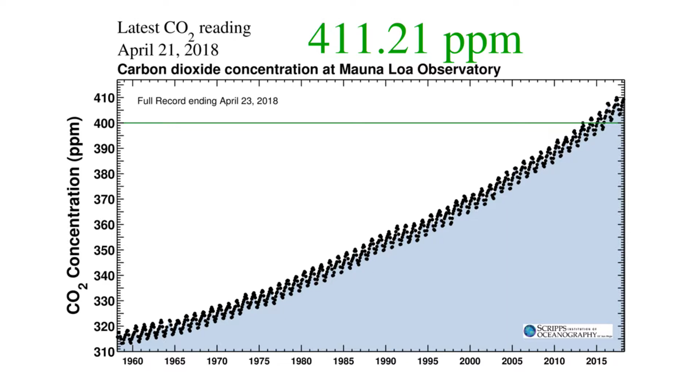We exist because the world is heating up, and you can see the Earth now has a 1-degree temperature rise. To avoid a 4-degree rise, energy reduction is needed now. UK energy between transport, industry and domestic is roughly about a third domestic, as in buildings and so on.

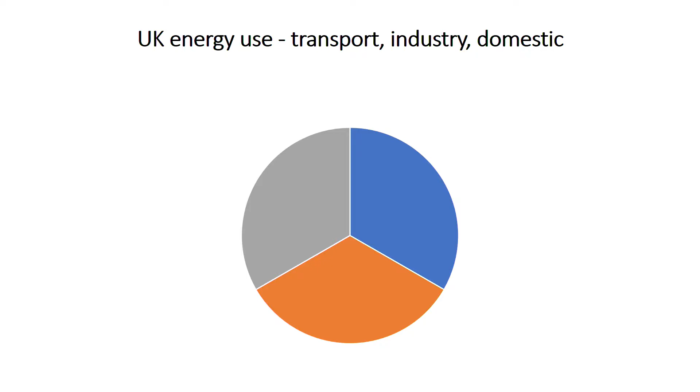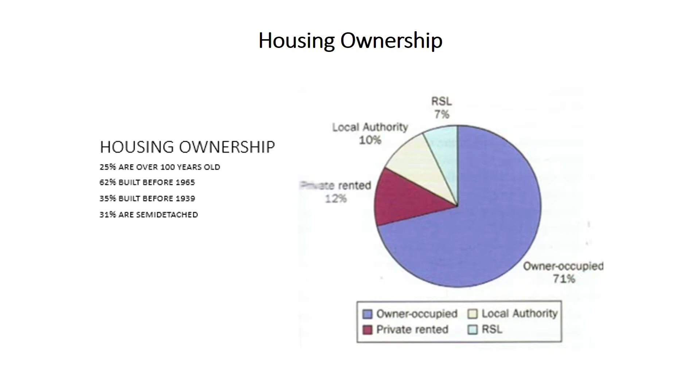These buildings are difficult to retrofit and so on. Housing ownership - private, rented and owner-occupied - is 80%, and very difficult to reduce. Residents have no clue what an EPC does. It gives a little bit of help, with millions of houses to tackle, but the question is how to do it.

Now, a few years ago, whilst pondering this situation, I realised my 40-year career in thermal imaging showed that it found faults and stimulated immediate action to fix them. So why not use it to inspect our houses?

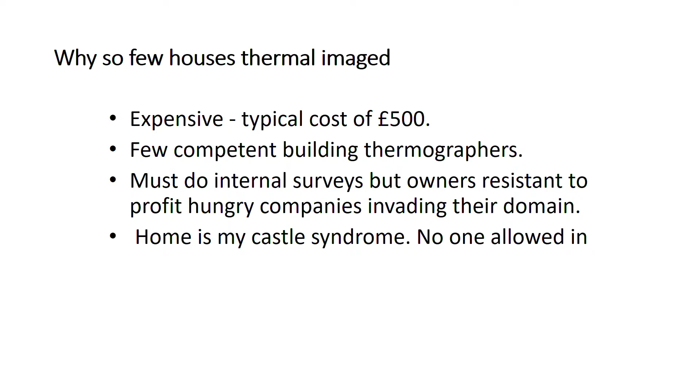The problem is that very few houses are surveyed because of the cost, and there are few building thermographers, and we've got to get inside houses in order to do any surveying. The solution was: get the kit cheap, do the survey incredibly quick - 2 hours - look at all services, and don't bother writing a report. The idea was, would this work?

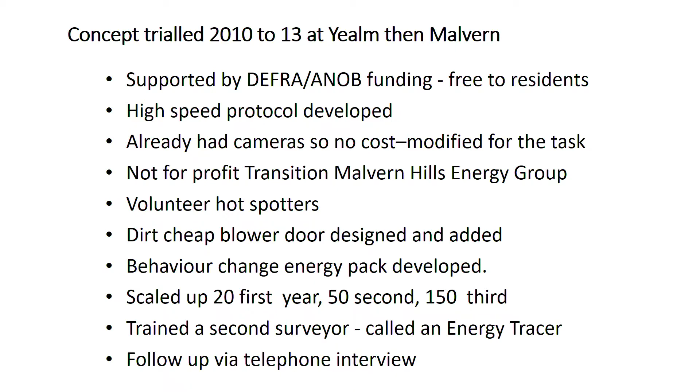So we put it into action. We trialled it at Yealm and Malvern, and it was a very comprehensive trial of technology and protocol over 3 winters. We ended up doing 150 houses in the 3rd year. The feedback from that was very, very good - 65% had already acted within 3 months, mostly with draft proofing.

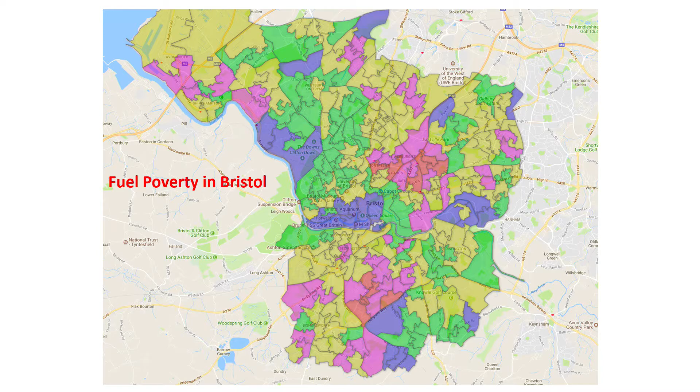So we formed a company called Energy Trace CIC to spread the concept to other parts of the UK. And we met this bunch called the Cheese Project Team in Bristol, the 3 guys there. They were inspired by this map of Bristol showing the areas where people haven't got enough money to heat and eat at the same time.

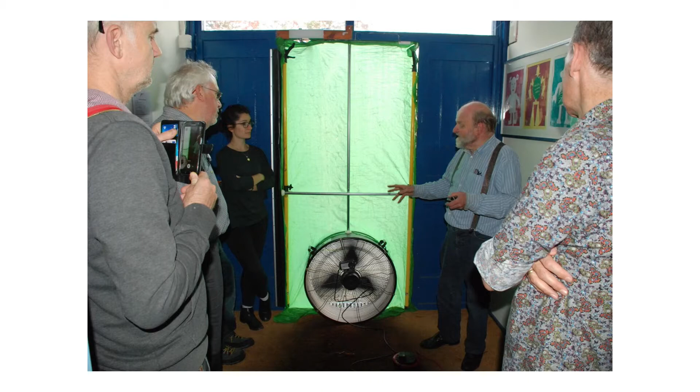We put all the kit together into a nice box, and then myself and Jeremy, who's a top-flight IT guy, developed our own application to run on the iPhone called HeatView. I introduced a blower door I had developed. This cost £150, very cheap.

It draws in the drafts so you can see them with the thermal camera. I also wrote a CPD-accredited course, a 3-day training program, which Jeremy covers the IT in. You can see the interpretation of images being trained there.

Now over 30 energy tracers have been trained and certified. 300 properties have been energy traced in Bristol, but together with all the other ones, we're approaching 1,000 houses now.

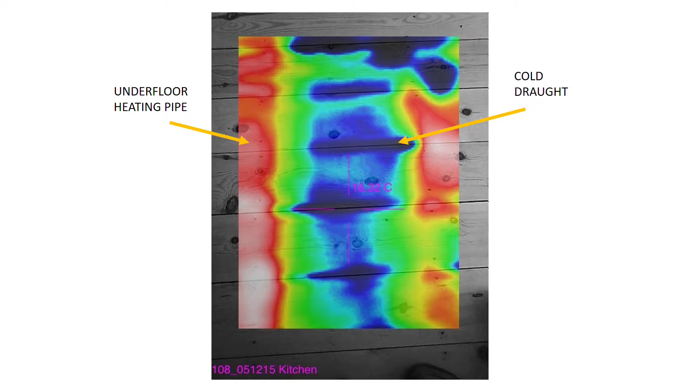It's used like this: the householder sees the picture on the tablet, sees the fault, and it compels them into action. Here you see a disaster of an extension, stripped floorboards, various window problems, missing insulation in walls. The big problem with dot and dab, which is a huge scandal.

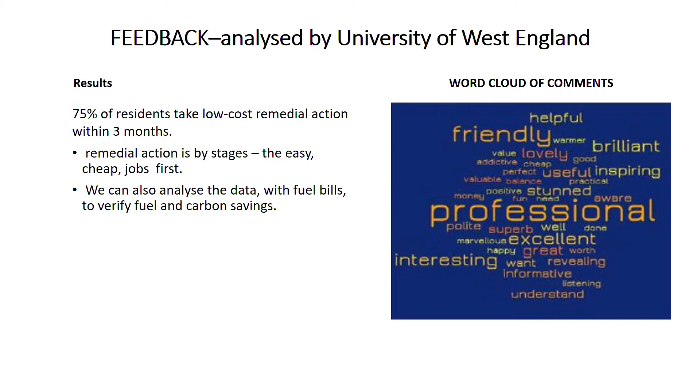And then here, more dot and dab. We leave a report on a stick with it, and an energy pack so people can actually leave there and do their behaviour change. Here's feedback analysed by University of West England, which repeats and gets the same results as got in Malvern. Masses of testimonials all over the place. Nobody hates us, they won't let us leave.

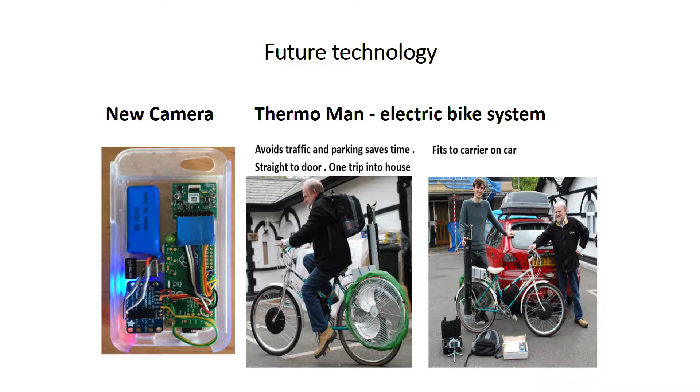We are expanding it now into other segments: South East London Community Energy, Phoenix Housing Association, Bath just picked it up, we've got about 8 more in the loop. Future technology coming: a new camera, all our own design, hardware and so on. Thermo Man, the whole system on an electric bike, so you can get around city centres. And now a project called CHEESE plus WUSU, warm up, and whatever it is.

Financially, we have got a balanced situation. We need funding to expand it from hundreds of houses per year to thousands - that's the main reason for that. And finally, we've won a nice award from Community Energy as the most inspiring energy management and conservation project in England and Wales. Thank you for looking and listening, and that's the kit.

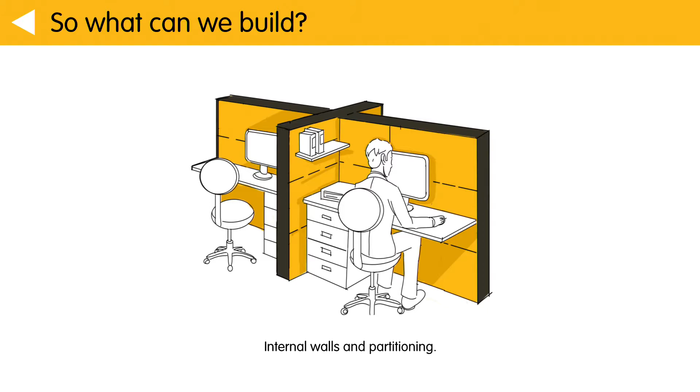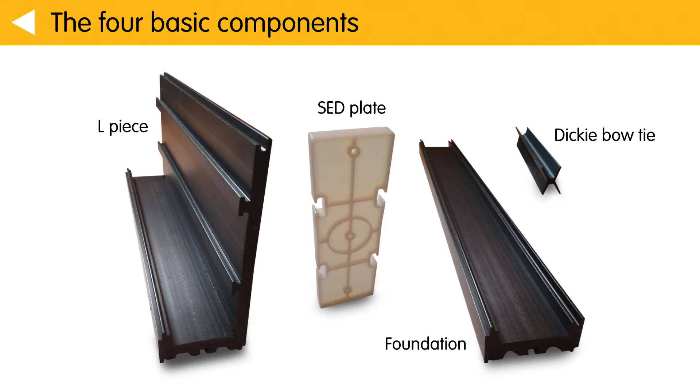Using these four components, we can build walls, and we can build anything out of it. We can build interior walls and partitions. We can build humanitarian shelters. We can build flood defences out of it. And we can even build buildings like this.

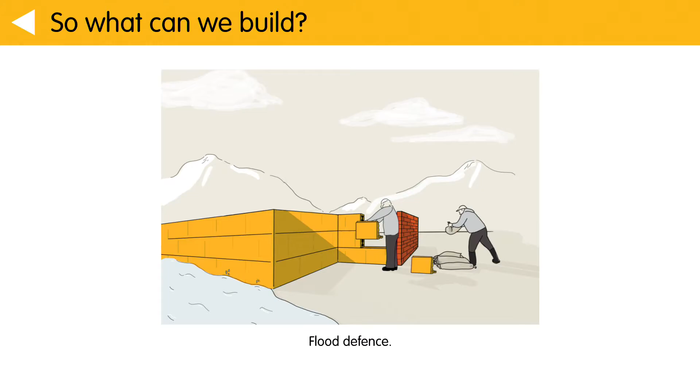What we do is, we have long extruded pieces that we build in an offset manner, offsetting the front to the back, and build block shapes that aren't really block shapes.

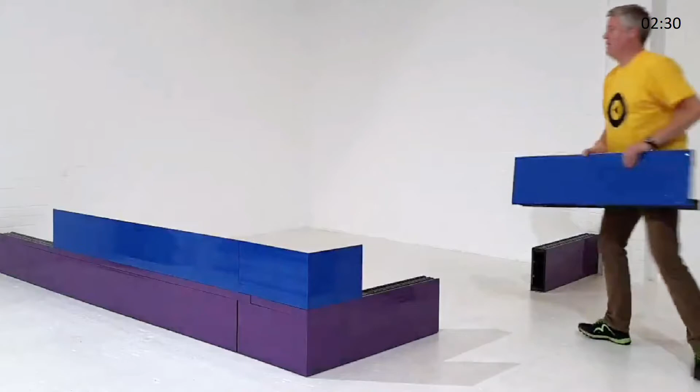As you can see in the top right-hand corner, this is how fast it takes me to build this building - I built that structure in just under 15 minutes. We can run cables and pipes through conduits

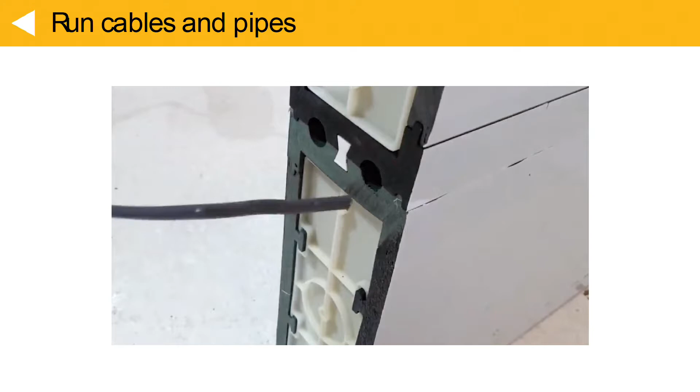between courses. We can fit any sort of sockets and boxes and tie them straight flush to the wall.

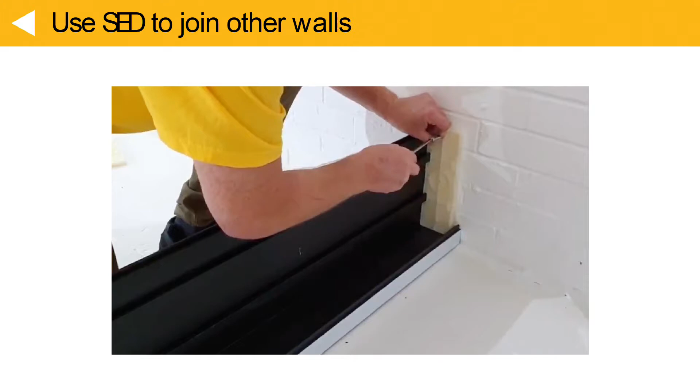We can even tie the Oval wall to non-standard walls, or non-Oval walls, should we say. We can attach windows and doors, and we can even put foundations in. As a final little piece, we can also build roof trusses.

And we can paint it, clad it, or even

wrap it. And when it's all said and done, we can pack everything away to one fifth of its original size.

We use no tools or glues. Only limited building skills are required. It's fully modular, and it's fire retardant.

It's patented in the UK, Europe, USA, China. And basically, you can't reinvent the wheel, but we believe you can reinvent the wall.

I'm Gary Giles. Any questions? Thank you.

Okay, so I've just been over in the resourceful materials session, so I'm quite interested in the whole plastic waste aspect of it. Could you expand upon what's going into it and where you're getting the stuff from?

Yeah, it's styrene based with an additive - an iron oxide additive - to make it unflammable, should we say. Sources of material are quite wide, really - anything from plastic hangers to the stuff your fridge comes pre-packed in, to parts from the interiors of scrap cars.

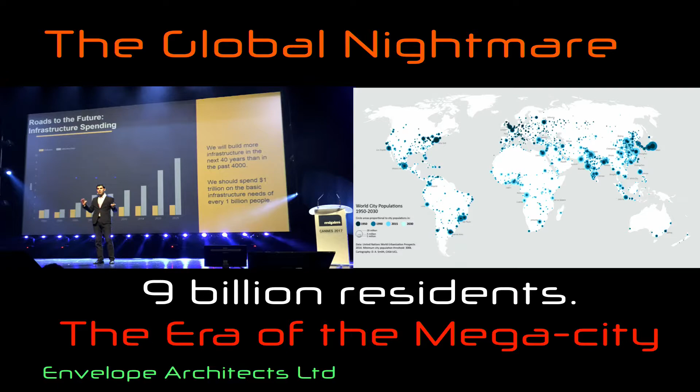There's 9 billion people in the world, according to global economists, and we're entering the world of the megacity. I don't know how we're going to get everyone around, provide good services, and how we're going to construct in this very compressed world.

Currently we've got this 2-chevron process on the motorways, up above 6 cars per 2 chevrons. I think with autonomous travel we can get it down to about 138.

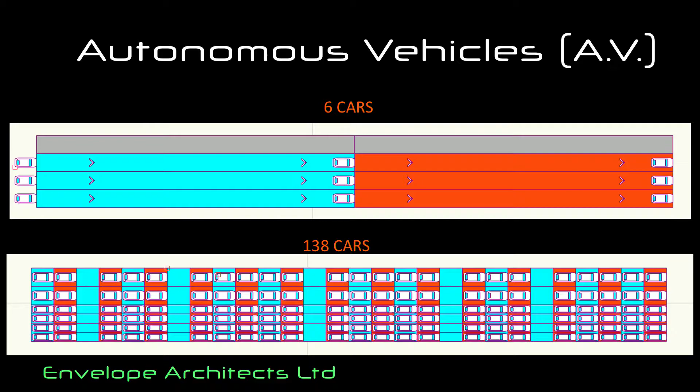So we've been thinking about this quite a bit. I think if we can get rid of all the heavy lift trucks trundling along during the day and put it on the night shift, that would be wonderful. So I'm into autonomous night driving with HGVs.

The displaced drivers can come into the construction industry because we have a skills shortage. So lots of good stuff going on with diversity, we need more of that. There's more training, retraining of servicemen, but I think getting all the drivers off the road and into construction would be great. We need to make construction more sexy.

I think let's get people becoming, rather than labourers, technologists. So there's autonomous dumper trucks, remote control, amazing things happening on site. We are really excited about that.

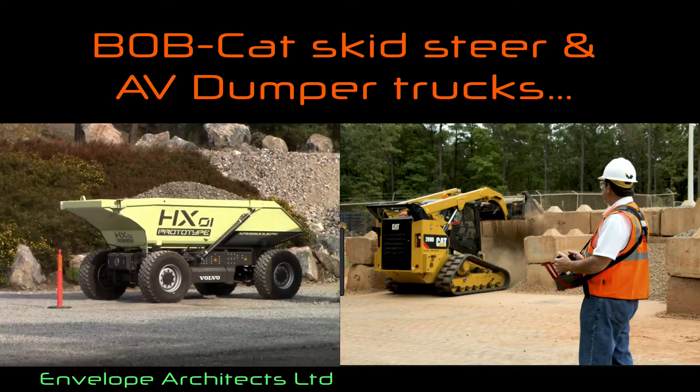For the challenge we've designed from scratch a variety of products that can work on site. This is a catch-all, a pallet shifter for bricks. It can move sheets of plywood and plasterboard around, put up plasterboard with self-balancing devices, go up ramps and stairs, and even fly in insulated concrete formwork. So that's helping everyone on site.

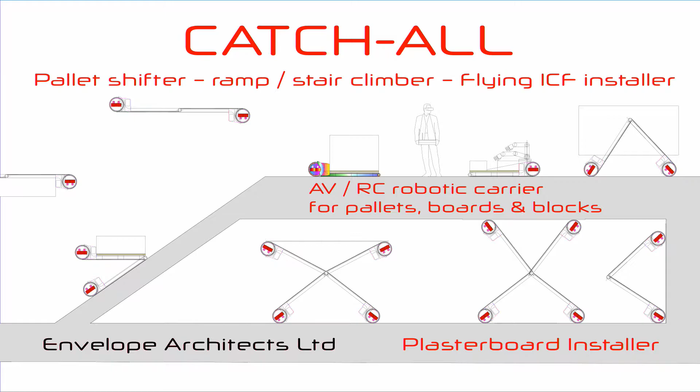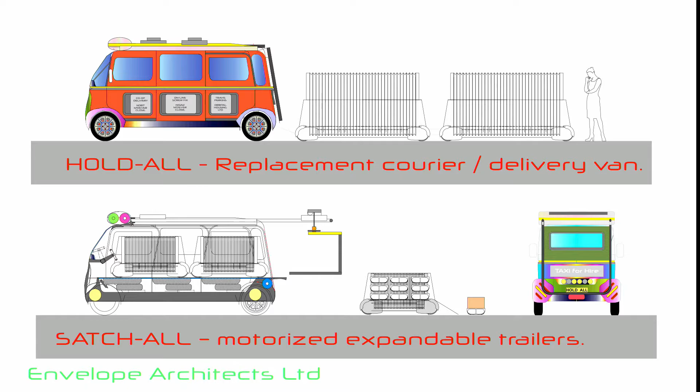We've designed a 9-seater minibus that can be compartmented into 3 different sections with complicated roller shutters, and also expandable trailers which we call Satch-All. So the Hold-All's a van - it becomes a pickup truck after becoming a taxi, so very useful indeed.

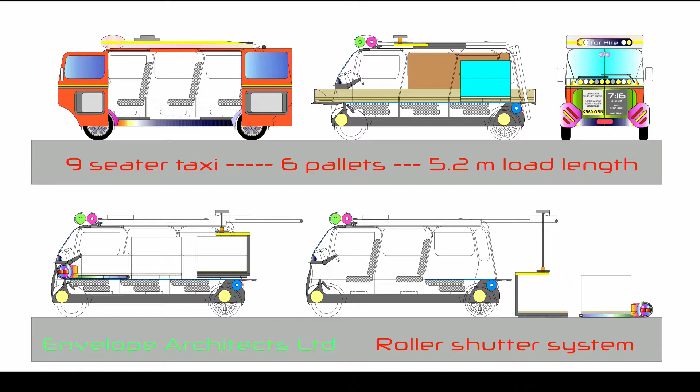You can see door-to-door, a 3-metre opening with no engine bay. We can move 5-metre I-beams around and 6 pallets, and also deliver it with this pallet lifter roof rack and all the complexity of the roller shutters dividing spaces.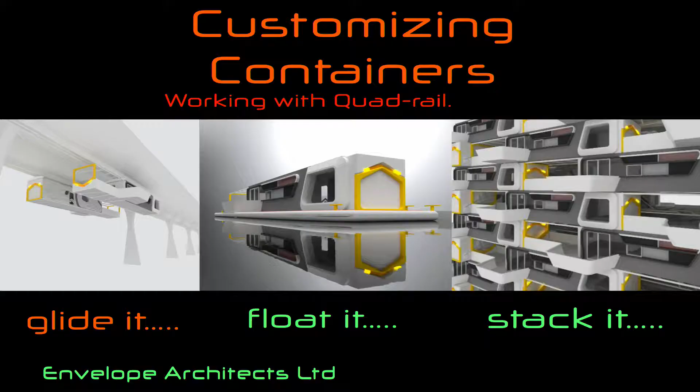Very, very efficient - it can go on the train, on the road, it's fully versatile, it can even go on the Hyperloop. This is us messing about with Elon Musk's idea of the Hyperloop. We've got converted sea containers that go underside of the tubes there. It could be an elevated railway.

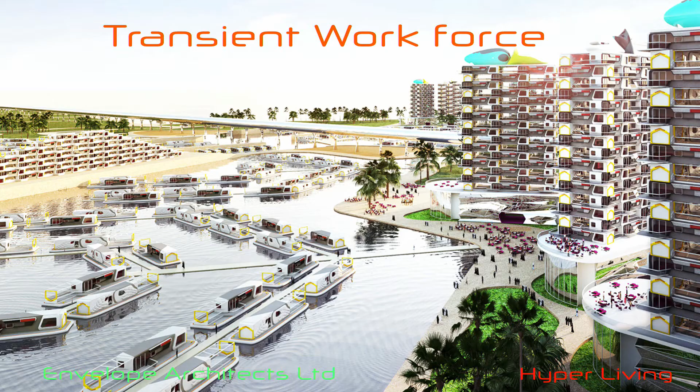Glide it, float it, stack it, and then you've got plug-and-play apartments that could also rest in pontoons. So we can actually do this. They're going to put 1 million people in between Oxford and Cambridge - we made a submission for that.

Instead of putting 60 miles of track down on the earth, we could elevate it and leave that 60-mile stretch as a linear park - that's what I think. There's quad rail there on the right, not quite the Hyperloop because we've got a few bends and twists.

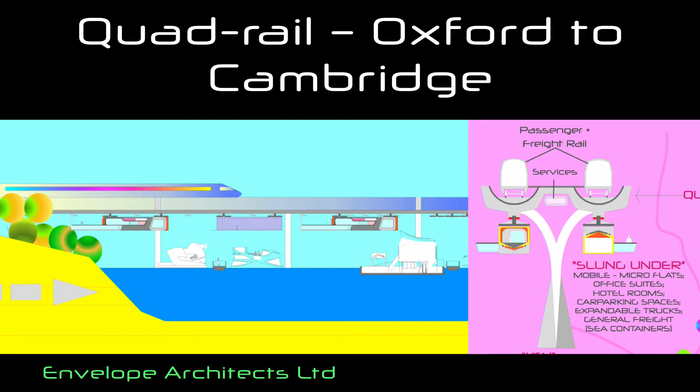Keeping with that mobile idea, because I'm very interested in mobile demographics, we're very interested in populating the tidal lagoons, which I think should happen in Swansea and Cardiff and the other 3 locations on the Devon coast. So we've designed a range of floating buildings that could inhabit the 11 square kilometres of space.

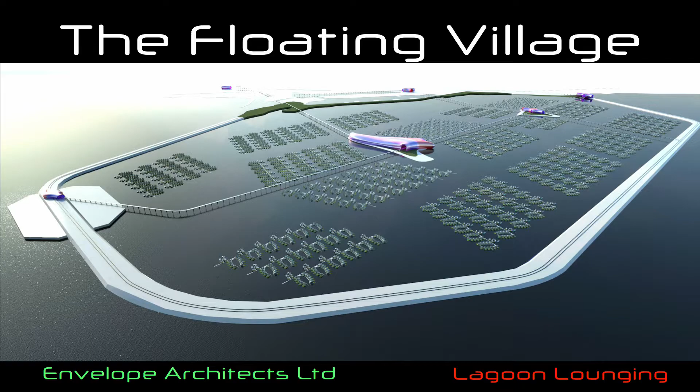We also got mass production, mass personalisation with trying to blur the edges between office, work and home with our Bloom housing - this is the Sunday Times runner-up.

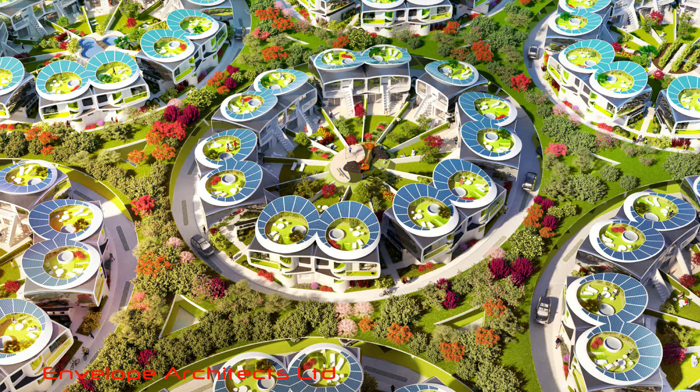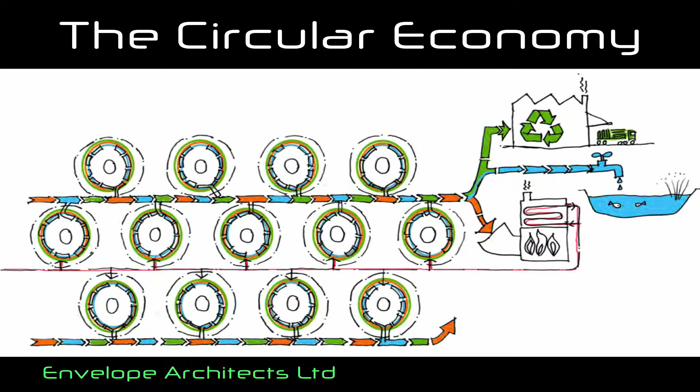This is a very clever design with an elevated forest, which has underground a circular economy with plastics, to convert plastics back into buildings, but also deal with flooding, which we're seeing a lot of.

We want to revolutionise with these mobile container workshops, which we call Boxels, so we can liberate people to build their own houses with assisted robotic remote workers, and perhaps heavy lift airships as well.

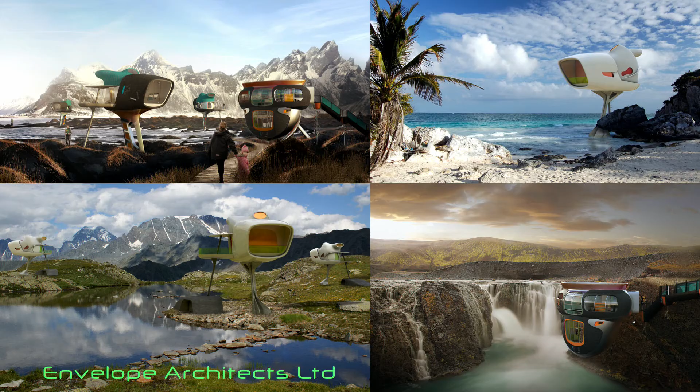This is a future city that we've been playing with where heavy lift airships bring goods in and out, and perhaps they could also deliver a little bit of extreme boutique off-grid holiday relaxation.

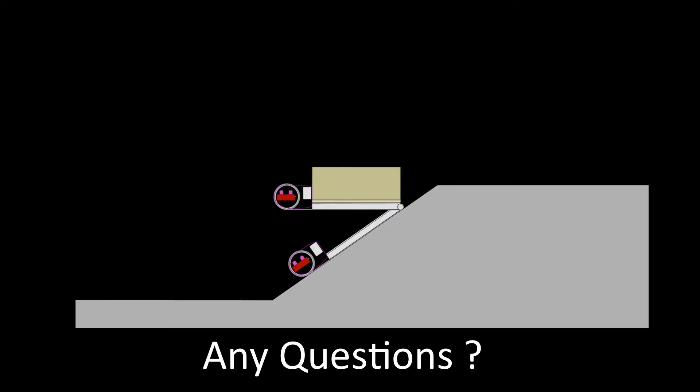No, I think I've been up to see a company in Swindon that does very large format 3D printing. So I think we're going to move on and focus on the pallet mover, and also the pod at the end that we showed. I think we're going to try and print that. If we win, perhaps we can show it here next year. So that's our focus, I think it's a lot of work to be done. We're going to need lots of friends.

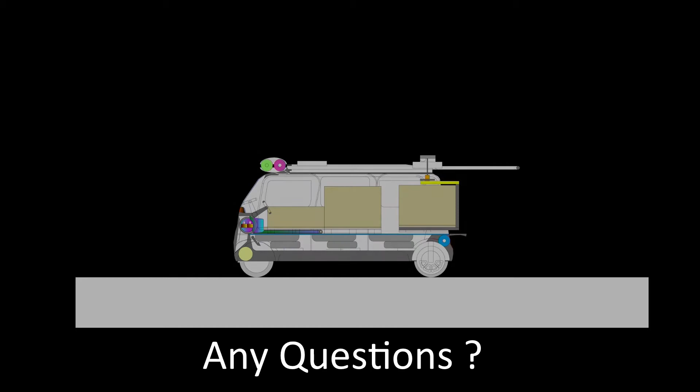And we need to probably make some submissions to the various innovation grant organisations to move it on. So perhaps the next year is about model making and forging partnerships with the right people. We have submitted previously some innovation grants, and we've also got the Orbital House that I showed you, the Sunday Times house. We want a place to build a show home up at Graven Hill.

So good question though, we effectively took the challenge in October and designed these modes of transport. So we're travelling at some pace.

Thank you, that was a wonderful journey.

I don't quite understand why you would focus on the pallet or plasterboard installation device rather than what I think you called the shovel, which was the transport node or end-to-end node. So what would you do first, and why do you do that first, and how do you get to market with that proposition? Yeah, so for example in Oslo, in about two weeks' time, there's an EV-AV conference, which I think is being dealt with by one of the partners here.

And you're right, it's quite a lot to focus on. So I guess a mobile device that I can manage is probably the pallet lifter that can climb and be self-balancing, and I think I'd probably like to work with a university. I have been on the Innovate Succeed programme, so I have started to forge relationships, but I need to get collaborators involved, and I think if I'm successful here, that would give me the exposure I'm looking for, and also the backing from the BRE. I've been to see them, they wanted the Orbital House put at Watford actually.

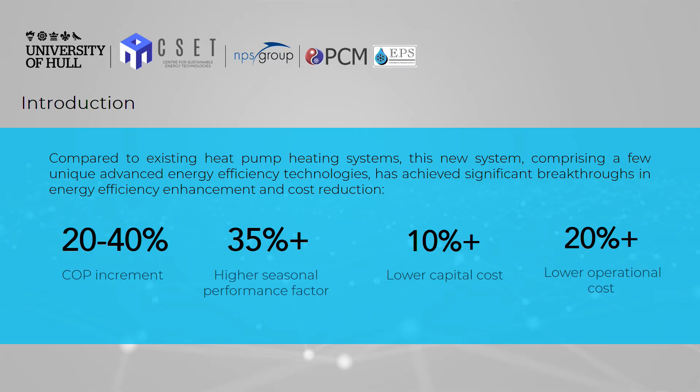Through 2 years of research, including simulation, optimization, prototyping, testing, and demo, we found our technology, compared to existing heat pump technology, can achieve around 20 to 40% COP increase, 35% higher seasonal performance factor, 10% lower capital cost, and 20% operational cost reduction.

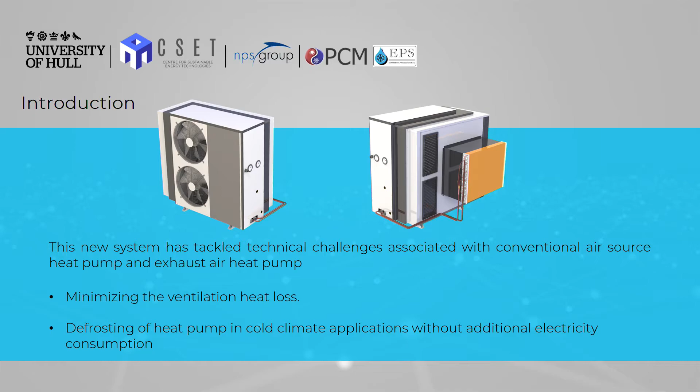Compared to existing air source heat pump and exhaust heat pump, our technology can maximize use of ventilation energy, minimize ventilation heat loss. We don't need additional electric input for defrost of the heat pump, with significant energy saving.

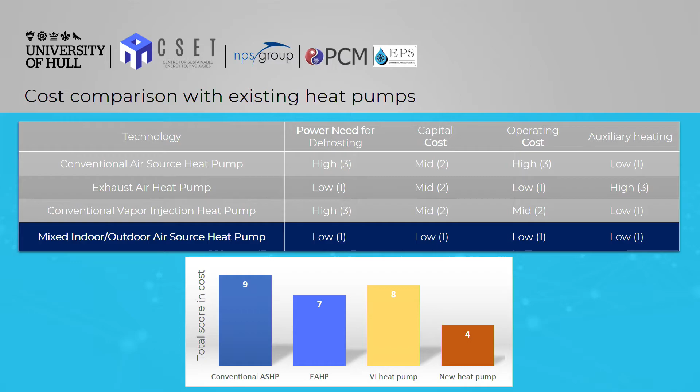Compared to conventional air source heat pump, exhaust heat pump, and conventional vapor injection heat pump technology, our technology needs the lowest power input, our capital cost remains lower than others, operational cost is least, and we don't need additional heat supply. Our system can supply enough heat for the building without any external heat supply.

This is a heat pump that can absorb exhaust air energy as well as fresh air energy. It's a double source heat pump that leads to about 30 to 85% increase in heat pump COP.

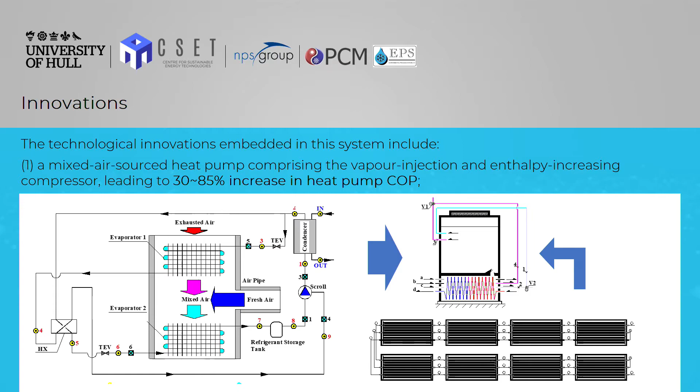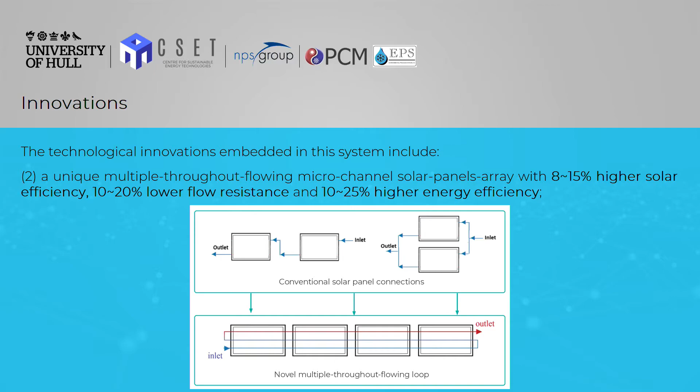We also have a multiple through-flow solar panel array, which can average the temperature of the solar panel, leading to significant increase in solar efficiency, which is 8 to 15% higher. We got 20% lower flow resistance and 10 to 25% higher energy efficiency.

We also make use of fast responsive heat storage heat exchange, which can capture solar energy and quickly deliver it to the room space, only 20 minutes whenever solar radiation is available. A traditional system would need at least 3 hours, which is significant energy loss.

We also make use of an internet-based intelligent monitor control system that enables instant interaction between human and machine.

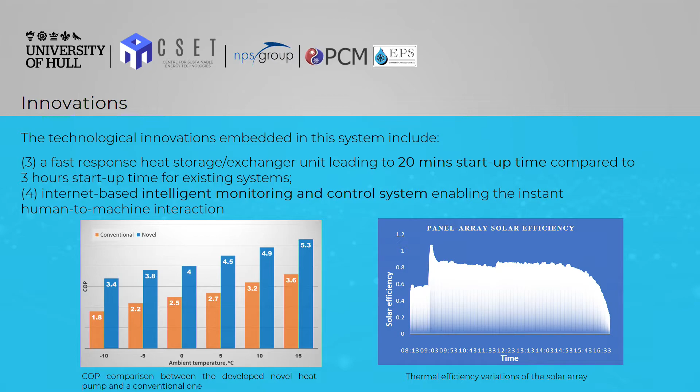This technology has been applied to the Guangdong 5-Star Solar Energy Limited building, and also the Applied Science Building at University of Hull, and shortly at Hull City Library. We have first generation system, second generation system, and third generation system.

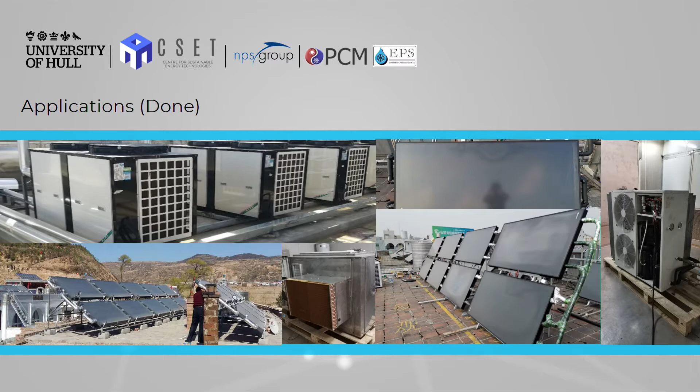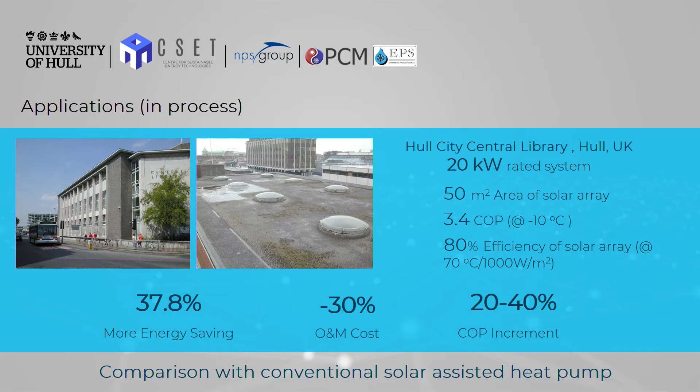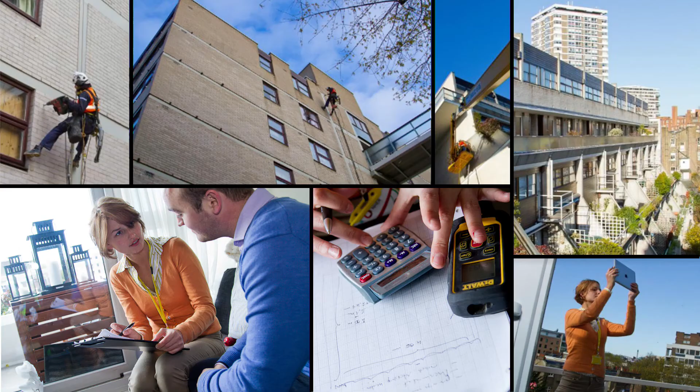Thank you very much, my name is Agnes Czako, and I'm a co-founder and managing director of Airex. We have developed a smart home solution to address the building retrofit market and address fuel poverty and climate change. My background is in building physics and passive house design, and prior to co-founding Airex, I led the delivery of 30,000 energy assessments in the most vulnerable, fuel-poor communities in London's social housing.

This was, on one hand, a very shocking but also a very eye-opening experience to see what the real problems are in real people's homes when it comes to energy efficiency and damp condensation. Poorly insulated, drafty homes contribute to 26% of the UK's greenhouse gas emissions. Recent research demonstrated that up to 15% of a home's total heat loss can be caused by air bricks, air ventilation holes, either at subfloor level or room level. It's a seemingly small problem, but it has a massive impact.

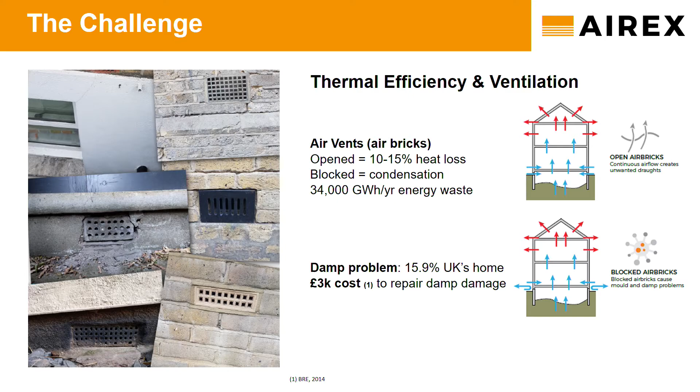At the same time, if occupants block these air vents permanently, it causes damp and condensation, risking their health. The NHS could save about £1 billion a year purely by treating asthma, which is correlated to poor indoor air quality. So we have this dual problem of thermal efficiency and air exchange, which we aim to solve, and that's exactly what the Airex system does.

It's basically an IoT-enabled smart ventilation control - technically an intelligent air brick that looks just like a normal regular air brick and replaces it like for like. The units have inbuilt sensors to monitor and analyze environmental conditions like temperature, humidity, and air quality, layered with online weather data. The vents communicate via radio frequency to a Wi-Fi connected home hub, through which data can be viewed by the occupant and the landlord. Based on its cloud-based algorithms, it regulates the airflow to control the otherwise uncontrolled ventilation.

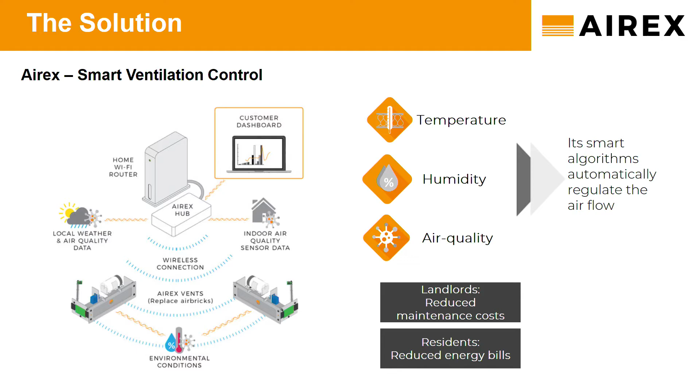So on one hand, it reduces heat demand and reduces the energy bill for residents, but also doesn't compromise damp and air quality. And for the social landlord, it also provides real-time property diagnostics so they could do preventative maintenance rather than expensive repair work.

So the system is passive. We are not introducing any fan power, but utilizing natural air movements like passive ventilation and stack effect. As a result, it doesn't need to be connected to mains power, but the units run on long-lasting batteries.

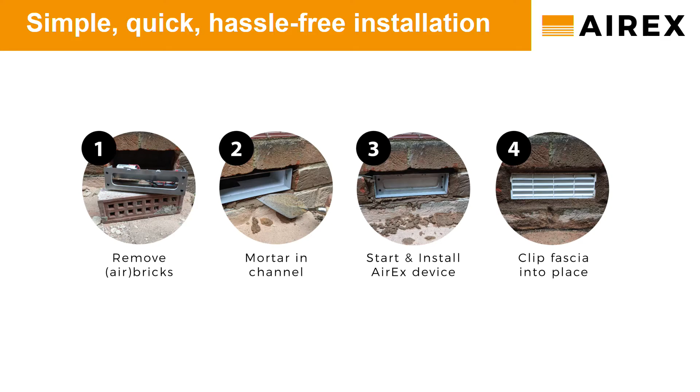So it can be installed really quickly with next to no disruption to residents. It's very simple masonry work. We typically partner up with cavity wall insulation installers, and it could be done in less than an hour per property.

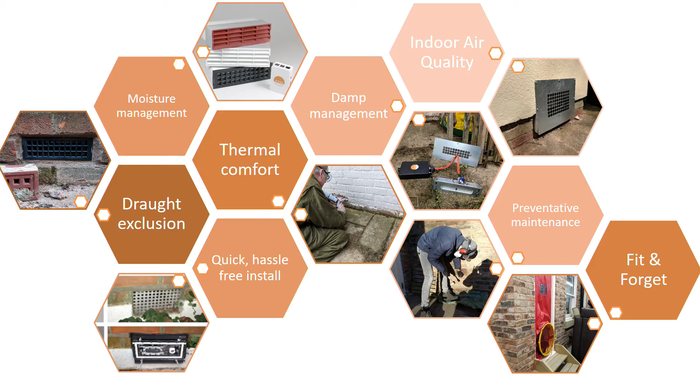We have rolled out the product on hundreds of properties across the UK, from Portsmouth to the Midlands and the North. And we have done a series of independent academic validations, monitoring in-situ thermal performance, so U-values of ground floor and air tightness.

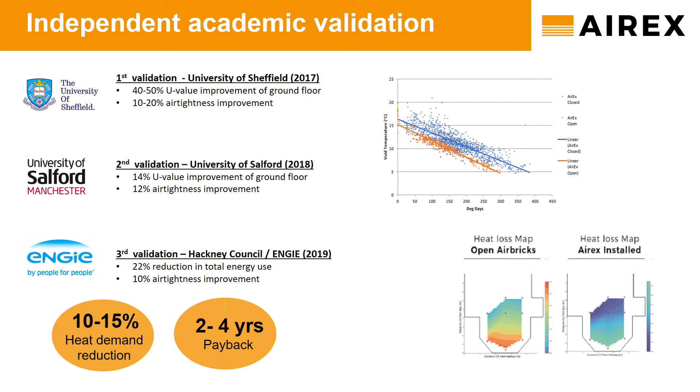And we managed to prove about 10-15% of overall heat demand reduction, which means the payback can be as little as 2 to 4 years.

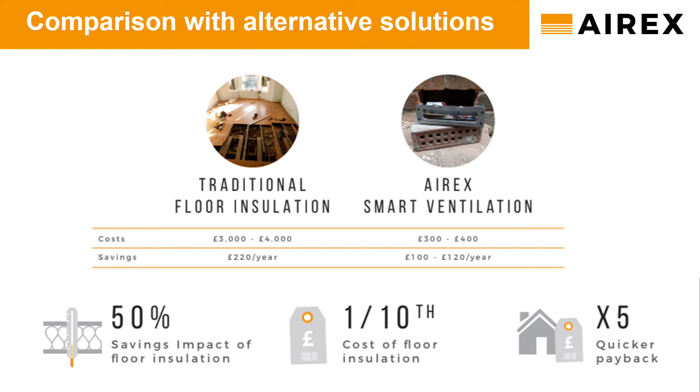And if we compare that with one of the closest proxies, traditional underfloor insulation, the Airex system can save half of the saving impact at one-tenth of the capital cost. So the payback could be 5 times better.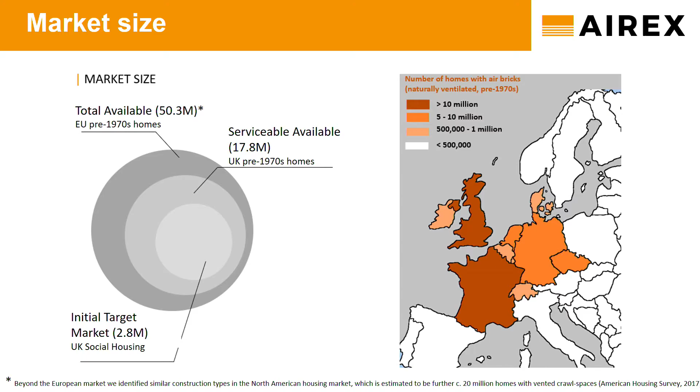And for an average typical social housing property, the total installed cost is about £500 per property. We have a market of about 50 million homes across Europe, and we're focusing on UK social housing first.

And the immediate commercial opportunity here is ECO. We are one of the first technology providers in the UK who received Ofgem approval to be adopted under the Energy Company Obligation scheme, as part of which energy companies have to contribute hundreds of millions of pounds to reduce their carbon emissions.

So Airex is one of the lowest capital cost per carbon saved solutions. And we can see that loft and cavity wall insulation is always going to have a really good payback, but their market is nearly saturated.

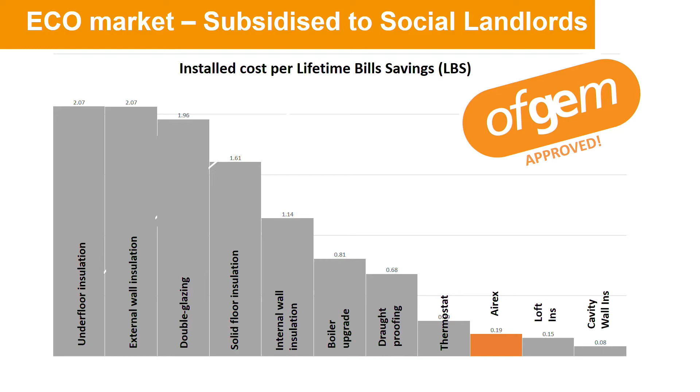So we won lots of industry awards, and we were featured in national newspapers and local papers as well.

And I think finally, to sum it up, we believe that we are bridging a very important gap within the building retrofit industry by being a smart connected home system, but without the complexity of the tech, because the installation is so simple and straightforward. Thank you very much.

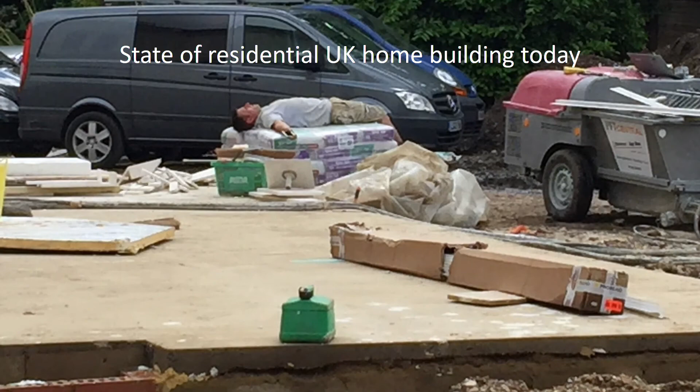diBuS stands for Digital Building at Scale, which is exactly what we are trying to achieve here - digitally building for the home building market in the UK. But what is the challenge we are facing? This is a typical UK site you will find all around the country, a picture taken by myself on site.

We go back with more than a decade of construction experience. You see waste all around, materials being broken, cars far too close to the site causing health and safety issues, and the skilled worker having a nap. So this is what we are up against.

What is our vision? Our innovation aims to have a positive social and environmental impact by modernizing the home building industry. What do I mean by social? We all know about the government target to build 300,000 homes by 2025 - we are about 100,000 short today. Social also means we've seen the skilled worker having a nap; we have a shortage of skilled workers, and we're going to have a shortage of workers as such.

And social for us also means, as a home buyer, I have no choice. I get whatever the developer builds for me. I don't have the choice to customize my home, I don't have the choice to look for different designs - I just have to buy whatever I get from the big developers.

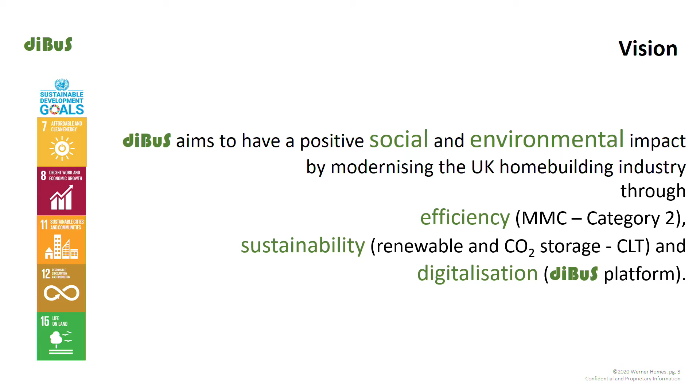A platform connects different members of communities and enables them to transact. We all know the Airbnbs, the Ubers, the Facebooks. But this doesn't exist for the construction industry.

So who is our community? On one hand we have developers, everybody who builds houses - it could be landowners, local authorities, housing associations, an SME developer or an SME house builder. On the other hand, you have the whole supply chain. What we're trying to achieve is to bring together everybody who builds homes with the supply chain, all in an automated process through an online home configurator for the home buyer.

The home buyer is empowered to choose their design, configure their home, and the whole process is then assembled on site by the developer.

What is the impact? It's going to be massive, specifically for SME home builders. Financially, the cash cycle improves - instead of build to sell, you're going to sell to build. And you get access to economy of scale of the supply chain if you're on a platform. On sustainability, we talked about the SDG goals of zero, and the aim here is to build zero carbon, zero waste homes.

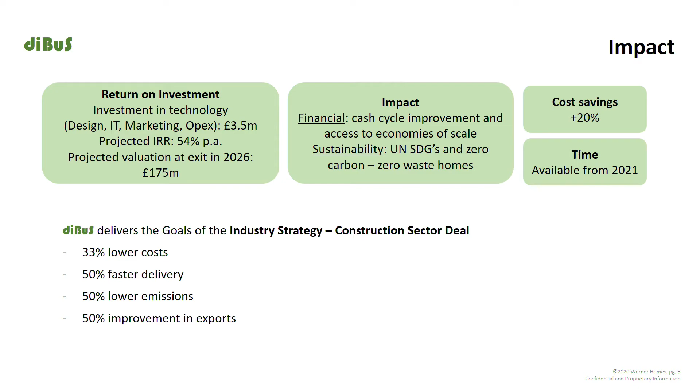So I'm going into your system, I'm configuring my home. How are you coping with the fact that different users have different priorities? One user may be looking for the lowest capital costs, some may be looking for the lowest running costs, or the lowest embodied carbon, or the most resource efficient, or the healthiest. How are you actually going to be able to give the user what they want according to their defined priorities?

So you're asking from the home buyer's perspective? Yeah, I'm using the configurator, but I want the home that is - presumably you're trying to tackle their wants and needs. In this example, we have taken Cambridgeshire County Council as the local authority, which is going to offer, let's say, 50 new homes in their county council.

Obviously the local authority will have to do the groundworks and the infrastructure, either themselves or through a builder, but they will not have to build. The home buyer will use the online configurator and choose from different digital twins the house they want - it might be a 2-bedroom, 3-bedroom, or 4-bedroom, and each digital twin version will have different options so you can configure your home. You might want the kitchen to be south-facing, a bigger master bedroom, an open kitchen, whatever you want.